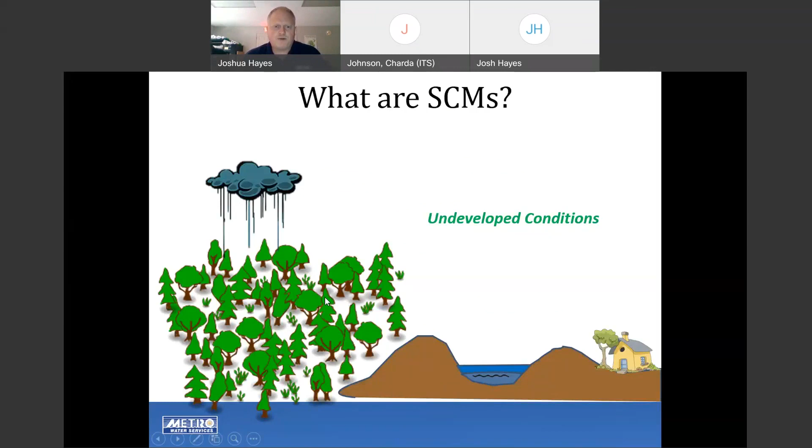So to start off, what are SCMs? I think a lot of people know what they are and what they're for, but just to recap: if you have an undeveloped property with a lot of vegetation, trees and grass, when it rains that vegetation acts as a sponge and a filter. When you develop a property, remove all that vegetation, and put up parking lots, buildings, roadways, that sponge and filter has been removed. So when it rains, all the pollution and contaminants on that parking lot and roadways wash downstream without a filter, and none of it is absorbed into the ground. So you end up with higher creek levels, downstream flooding, and the water in the creeks is a lot more polluted.

So what we require when sites develop in Davidson County is that they put in structures that intercept that water coming off those dirty parking lots and act as that filter and sponge that was removed when the development removed that vegetation. So what we're trying to do is get the same end result: clean water and reduced flooding downstream.

It's important to note that the sites you guys represent or may own would never be allowed to develop without these structures. The only reason they were allowed to get a grading permit was to put these structures in place and to sign an agreement ensuring they're maintained by the property owner and all future property owners.

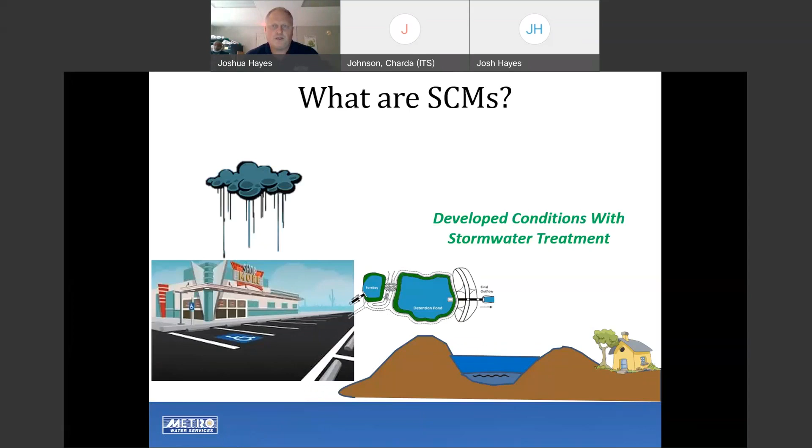So real quickly, a brief history of our regulations. Our first stormwater management program really started in the late 70s, and it was all focused on flooding, really on large developments. We made them put in large detention ponds to prevent downstream flooding. So we ended up with large ponds with large pipes that discharge from them. We slowed down the water a little bit, but still a lot of the pollutants were going through the outlets.

In the late 90s, with new permits handed down through the EPA with the MS4 permits, we had to expand our program and also treat post-construction runoff with water quality. So the outlet structures on these ponds became a lot smaller. We had to hold back the water a lot longer, and settle out the pollutants into the basins so they weren't discharging through the pipes.

When we changed our regulations in the early 2000s, grading permits were required for every site that disturbed over a quarter of an acre. So if you were getting a grading permit, you had to put in these permanent post-construction controls, what we call SCM, stormwater control measures. In the early 2000s it took off, with hundreds of them being installed across the county as the developments went in.

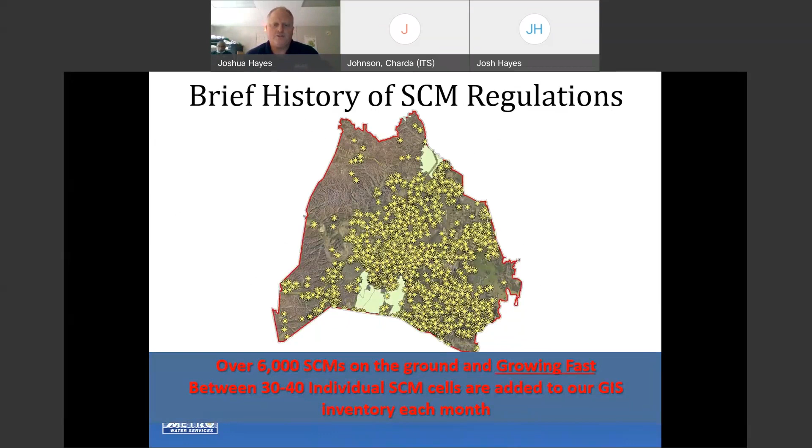Currently we have over 6,000 structures in the county, across all the various watersheds where development is occurring. With development here in Nashville, we're adding about 30 to 40 a month to our system. Basically, when projects get signed off after the construction phase, they come into our system, and then it starts the process of us going out to the sites, making sure the property owners are maintaining the structures.

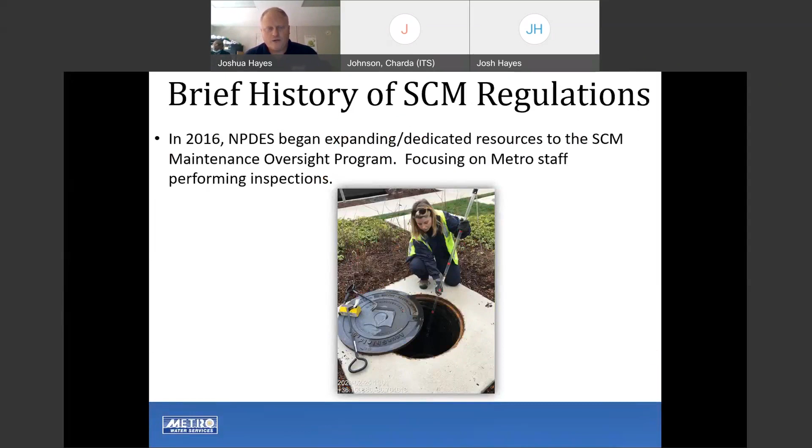So with that said, with the sheer number of structures in our program, we realized we needed to expand our program so we can reach out to all these property owners. We really started expanding our program in 2016 so we can focus on doing our own inspections, but also work with property owners to submit their annual reports. So that's a brief overview. Now I'm going to turn it over to Liz Steinstraw. She's going to give you a little information on the different types of structures that we have.

Hi everyone, I'm going to talk about the different types of SCMs we have. Within our county, we have about 6 that we consider the big 6: dry detention ponds, proprietary devices, wet ponds, bioretentions, permeable pavement, and water quality swales.

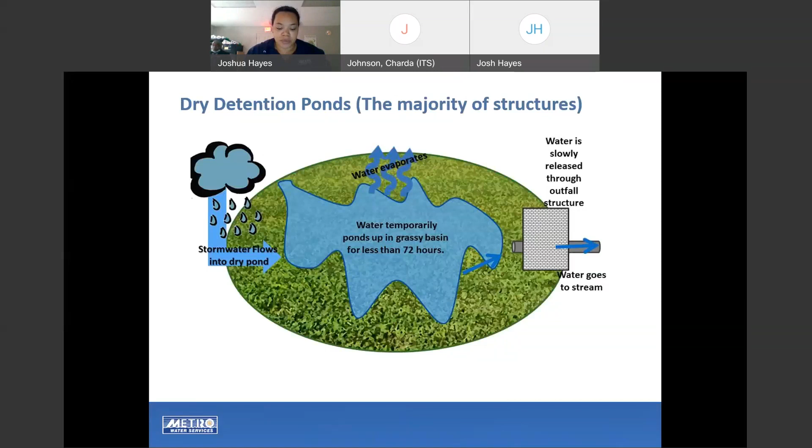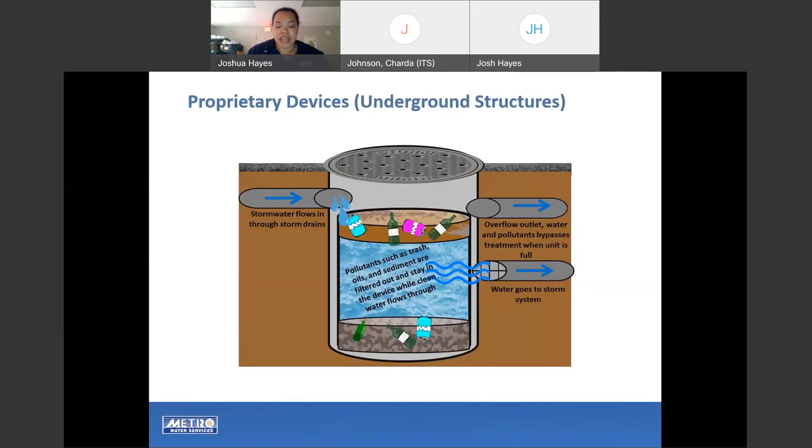One of the newer members of the Big 6 are bioretentions, more commonly known as rain gardens. A bioretention is an engineered basin filled with specialized soil mix and native plants. When stormwater enters the basin, several processes begin to take place: retention of stormwater to aid in prevention of downstream flooding, infiltration through the engineered sandy soils, evapotranspiration of water from the vegetation, and root systems uptake water, and in some cases, pollutants, as nutrients for survival. These structures are to drain 24 hours after a rain event and must maintain a 75% vegetation canopy coverage.

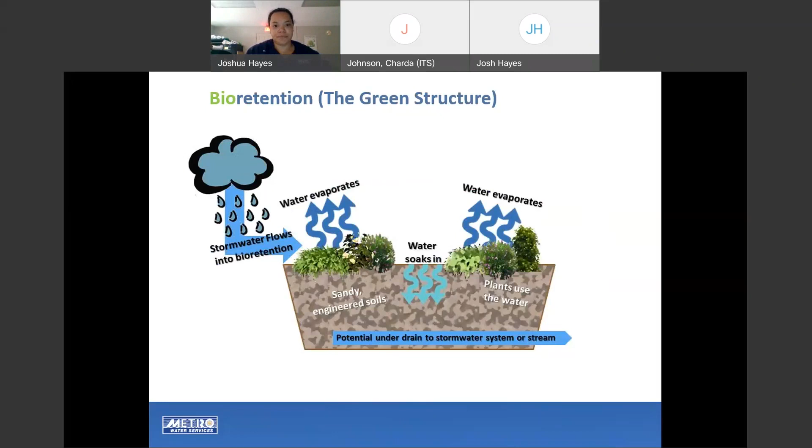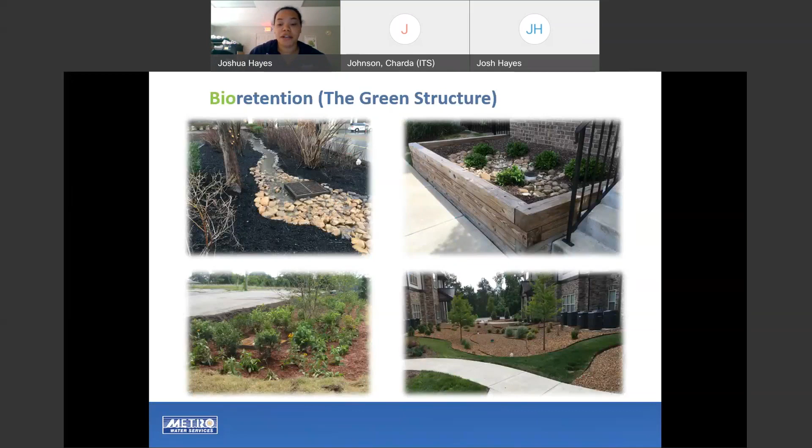Another SCM type is the wet retention pond. Wet retention ponds can consist of a combination of permanent deep pool water and shallow marsh. These ponds allow pollutants to settle out of the water, encourage natural microbial activity that cleanses water, and reduce the overall amount of rain runoff. Sediment, trash, nutrients, metals, and pollutants settle out into the retention pond. Rainwater runoff remains in the wet retention pond for days to weeks while the pollutants settle out.

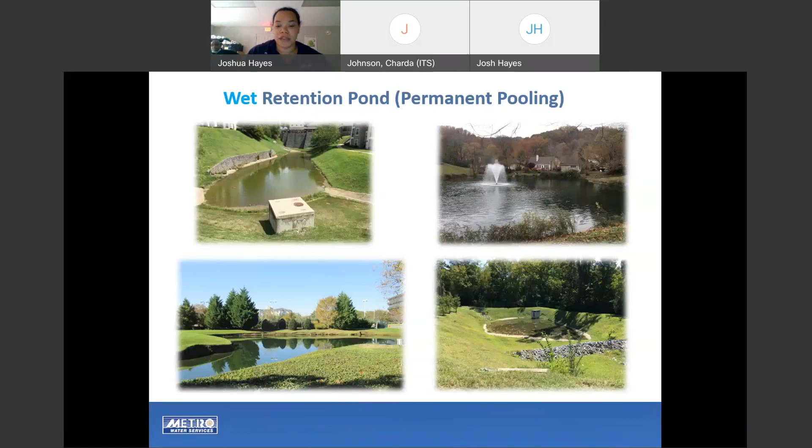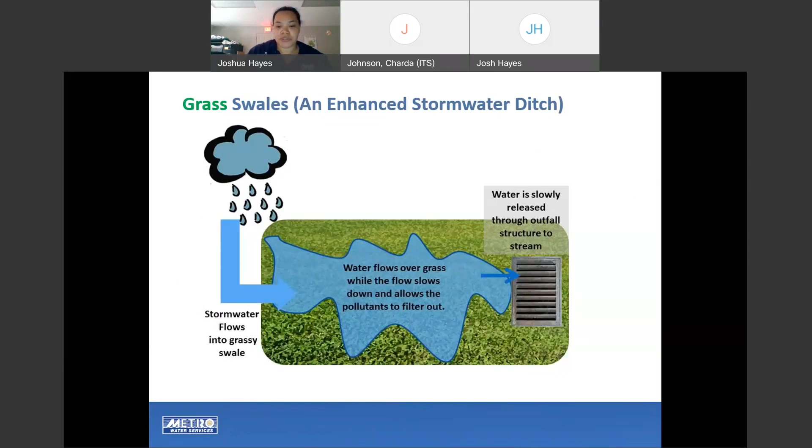The last of the big six are permeable pavements. These pavements have layers of various sized gravel and soil that filter pollutants out of stormwater runoff. During a rain event, stormwater soaks through the permeable pavement into the soil. Car oil, sediment, and other parking lot pollutants are filtered out of the stormwater by the subsurface soils.

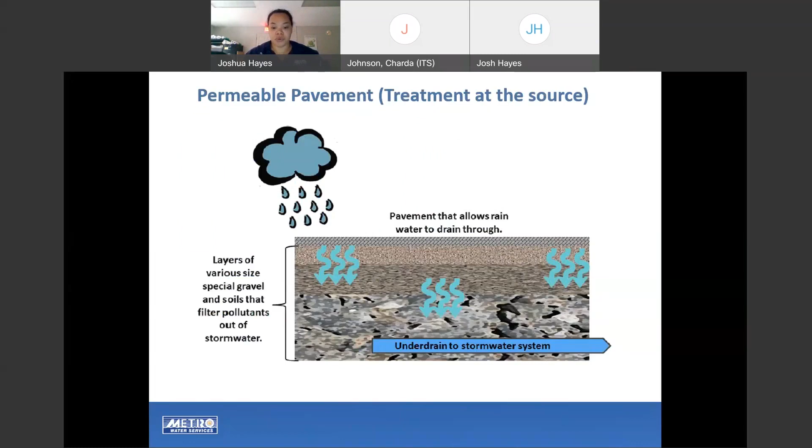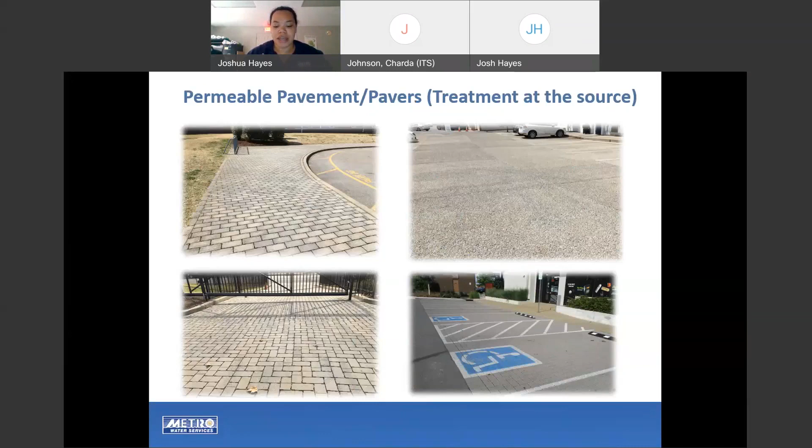Hello, everyone. I'm Jessica. I'm going to talk about the SCM inspection process.

In 2016, NPDES began expanding dedicated resources to the SCM maintenance oversight program, focusing Metro staff on performing SCM inspections. We started by dividing the county into 3 sections for each inspector. We have an inspector for the east and west sides of the county, as well as a downtown inspector.

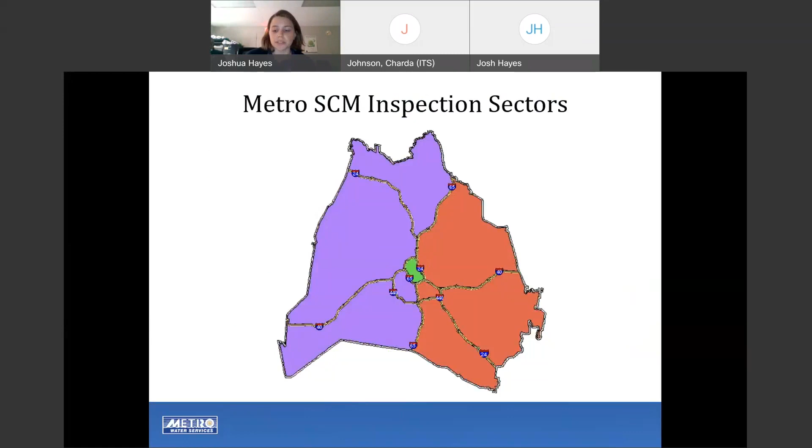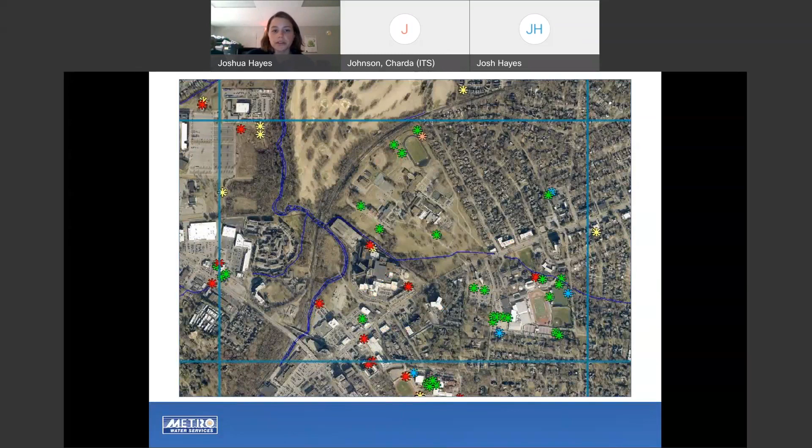We then divided the county into half-mile grids, and we select a grid at random and inspect the SCMs within that grid. Each asterisk that you see is an SCM color-coded by type. The green are bioretentions, red are water quality units, yellow is dry ponds.

So what do we bring with us to an SCM inspection? If they're available, we bring original plans or drawings, aerial maps, an inspection form or something for taking notes, a camera, and tools. So if you have a water quality unit on your site, you'll want something to open that manhole lid.

During our inspections, we use the plans as a guideline for how an SCM should look and function. If they're available, this is what we have on hand for every inspection.

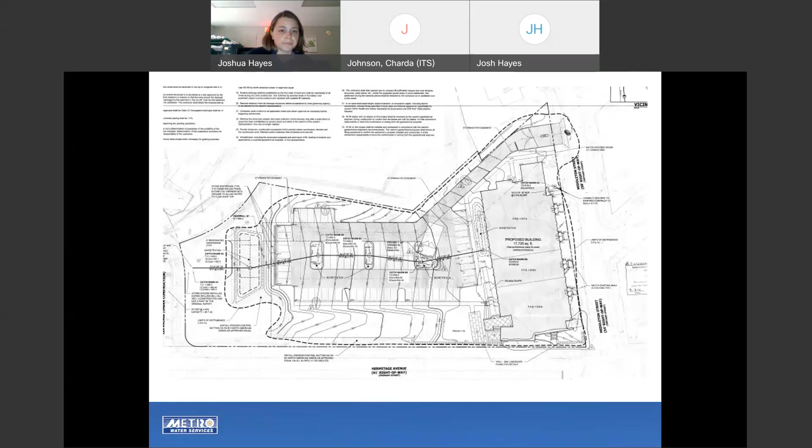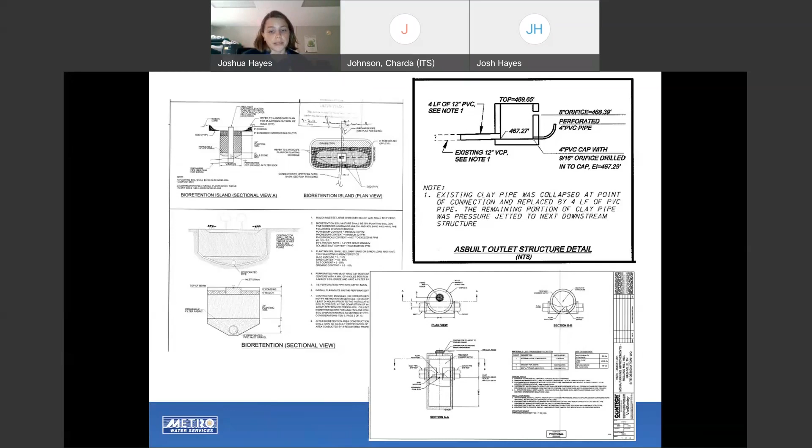Another thing, if you have a bioretention on your property, something useful to have is the original landscaping plan. This could tell you what types of plants were originally installed and how many of each plant. We use the landscaping plan to determine if the amount of vegetation in a bioretention we see during an inspection is acceptable or not.

So when the inspection is complete, if the SCMs are in good condition and functioning, no notice will be sent to the property owner. But we'll try to speak with someone on site if minor issues are noted. And if the SCMs have issues that could impact function, an inspection notice will be sent describing what needs to be addressed.

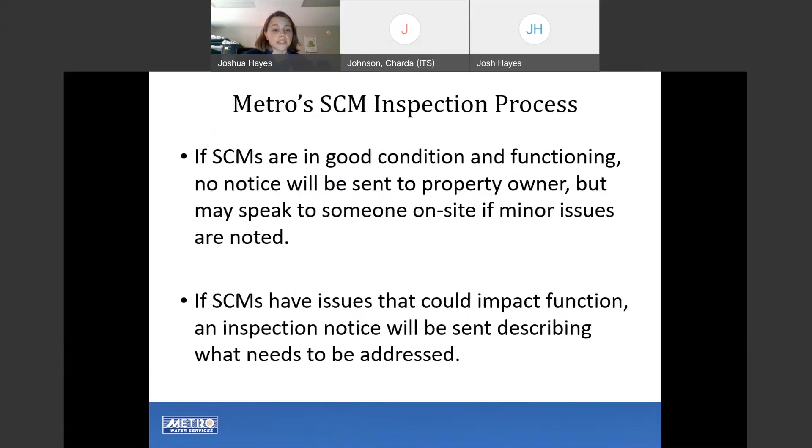Here's an example of a notice of inspection that some of you have perhaps received in the past from us. We include a page where we write out the issues we saw during our inspection. And we also include pictures, an aerial map, as well as the original plans or drawings if they're available.

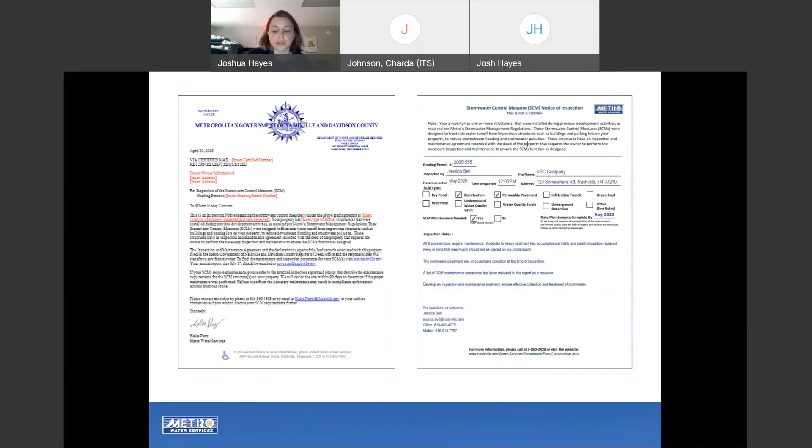And lastly, we include in our inspection notices a list of SCM maintenance companies. Something to note, these are companies who have submitted a signed statement to Metro that states their company will abide by our guidelines. This list is not a recommendation or endorsement by Metro, nor is it an exclusive list of companies that offer SCM maintenance services.

And something to keep in mind as a property manager, your landscaping team might not know what a bioretention is. And it's definitely not a good idea to ask them to clean out a water quality unit. So it's important to find a professional that knows what SCMs are and how they function.

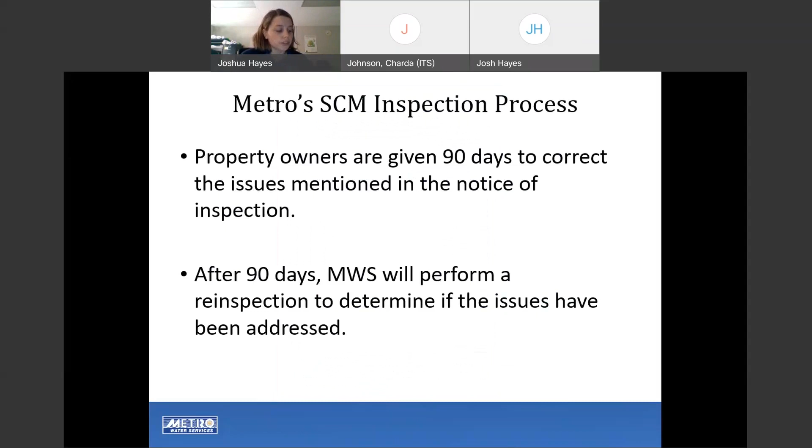So after you've received the letter, property owners are given 90 days to correct the issues mentioned in the notice of inspection. And after 90 days, we'll perform a reinspection to determine if the issues have been addressed.

So if a site has altered or removed their SCM, and compliance hasn't been achieved through sending a notice of inspection, we will enter enforcement proceedings. This could potentially involve issuing administrative penalties to the property owner. The next steps could be environmental court or placing a hold on all future permitting for the property.

And that's a general overview of our inspection process. I'll now pass it over to Rob and Matthew.

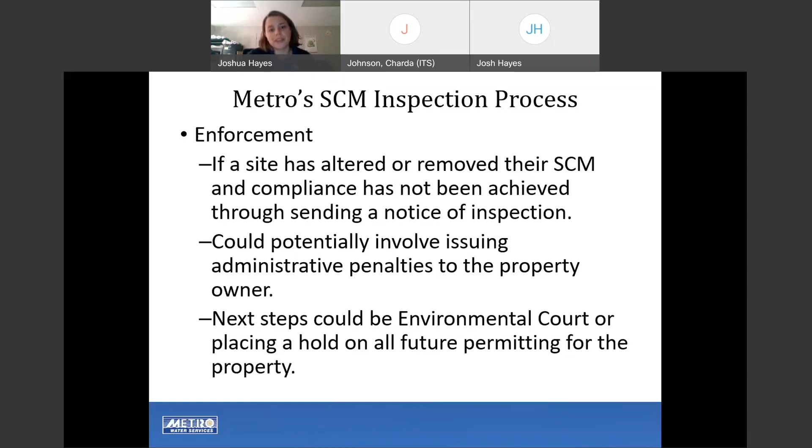So there are many different types of stormwater control measures in Davidson County, but we'll just be going over some of the maintenance requirements for the big six.

But whatever type you have, you should ensure that it's clear of trash, sediment, and debris. And of course, you'll need to stabilize any exposed soils and ensure ditches and pipes routing to the pond are free from erosion and damage. It's important that dry ponds drain within 72 hours after a rain event.

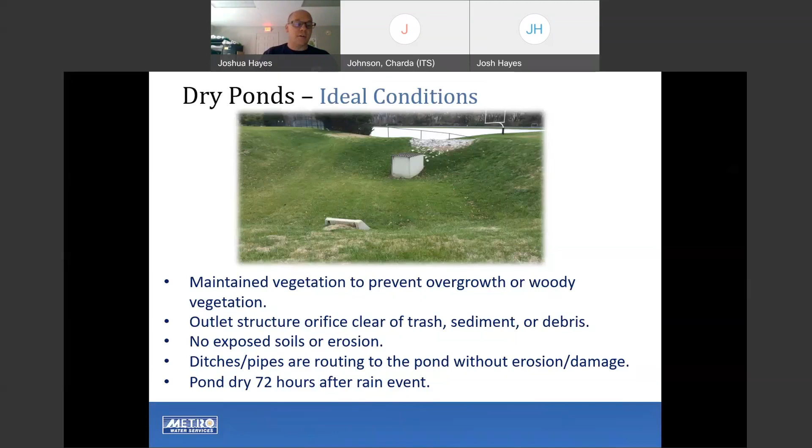One of the best times to inspect a dry pond is a few days after a rain event to see if it's still holding water. If it is, often it's a simple fix like removing debris or sediment from around an orifice. Other times, regrading may be necessary.

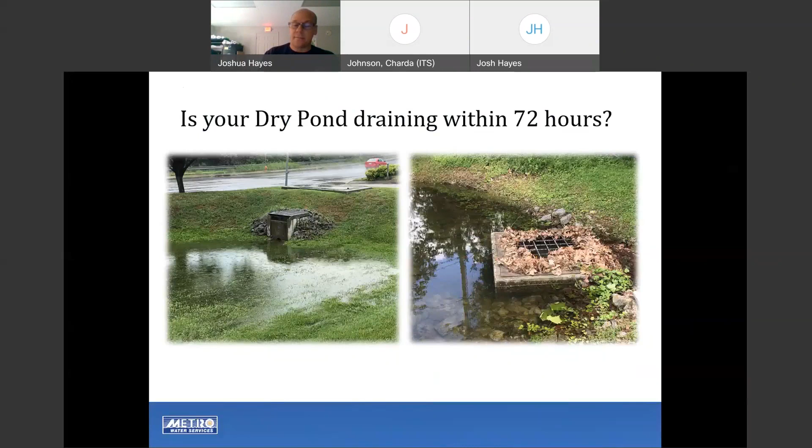So often we see pipes disconnected from their head walls, and if it's caught early and the gap is filled and regrouted, then more costly repairs can be avoided in the future.

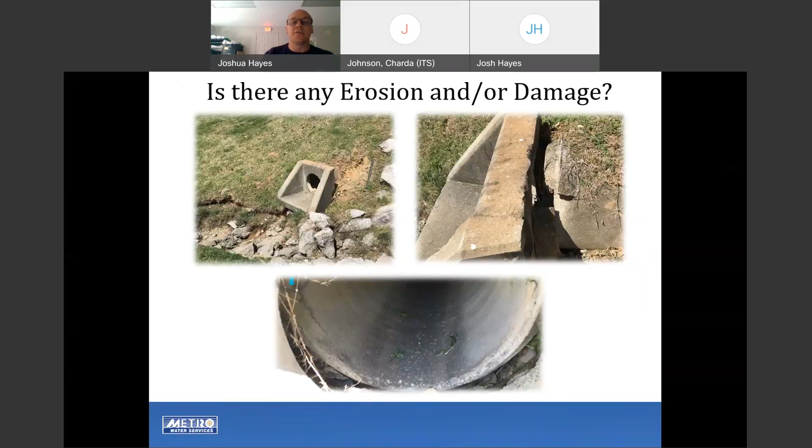So just to reiterate, you should inspect your outlet structure regularly and remove any obstructions.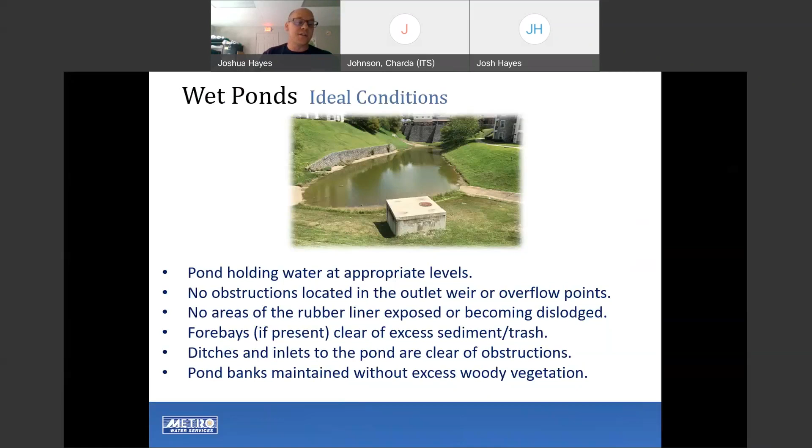So with these, you'll want to ensure that there's no obstruction in the outlet, weir, or overflow points, that the rubber liner, if present, isn't exposed or becoming dislodged, and that forebays, if present, are clear of excess sediment and trash. And the same as for dry ponds, ensure that ditches or inlets are stable and clear of obstructions. Also, the wet pond banks should be maintained without excessive woody vegetation to prevent any leaks or damage.

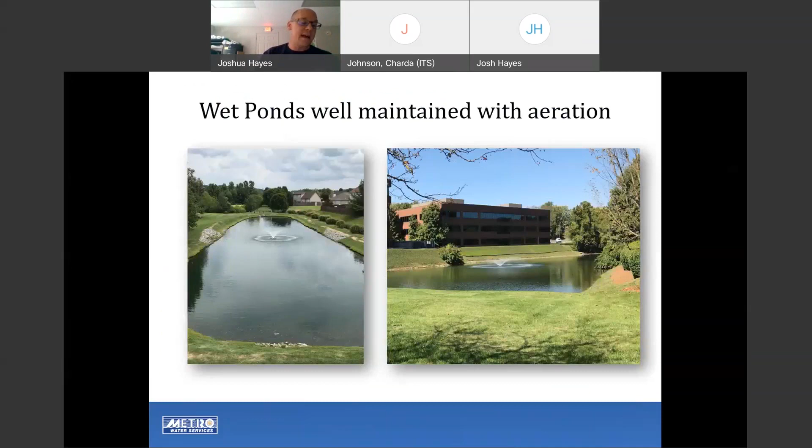So here's some examples of well-maintained wet ponds with aeration. And although we don't require aeration, they can control algae and be a nice addition to your landscape.

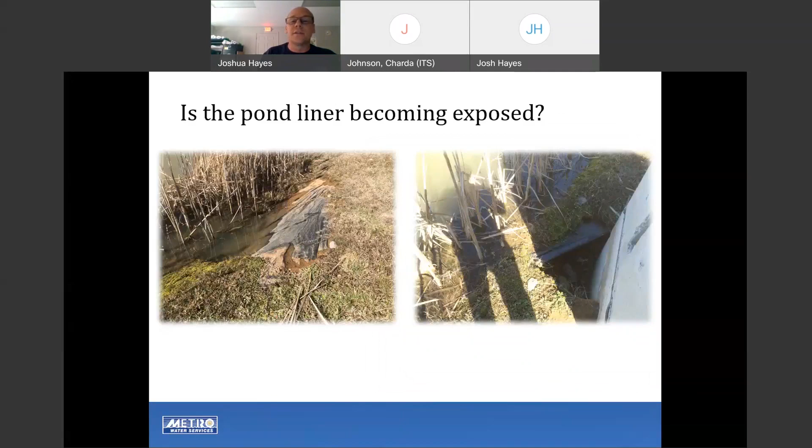So here's the line showing a liner that's got erosion going into it. You'll want to catch that early as well.

So if you do have a forebay, you want to make sure that, since these prevent sediment from entering the wet pond, it should be cleaned out regularly to prevent more costly removal from the wet pond itself. The cattails are indicators that there is excessive sediment that should be removed.

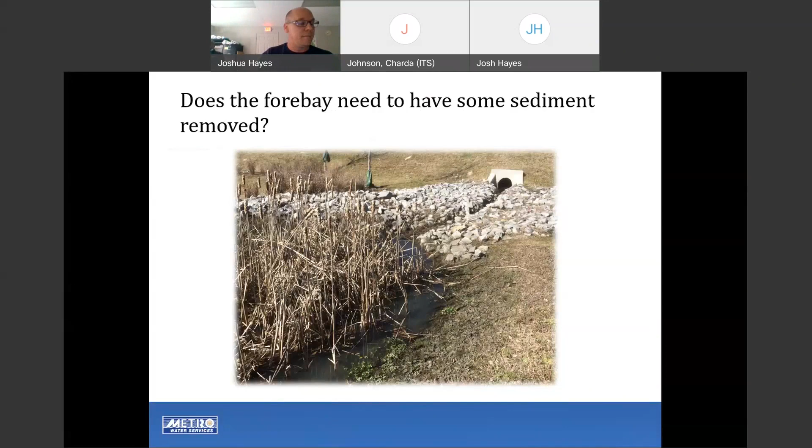So bioretentions or bioretention basins - while dry ponds are historically the most common SCM in our area, bioretention basins are the most common being installed currently because they have been proven to be very effective in treating stormwater runoff. However, they do require vegetation to be maintained frequently throughout the year to prevent unwanted vegetation from creeping in, similar to weeding your garden or other landscape on your property.

Washed out mulch or stone should be replaced as needed. There should be no erosion along the sides or at the inlets to the basin. The basin should drain within 24 to 48 hours after a rain event, and there should be no signs of overflows or bypassing from small storms.

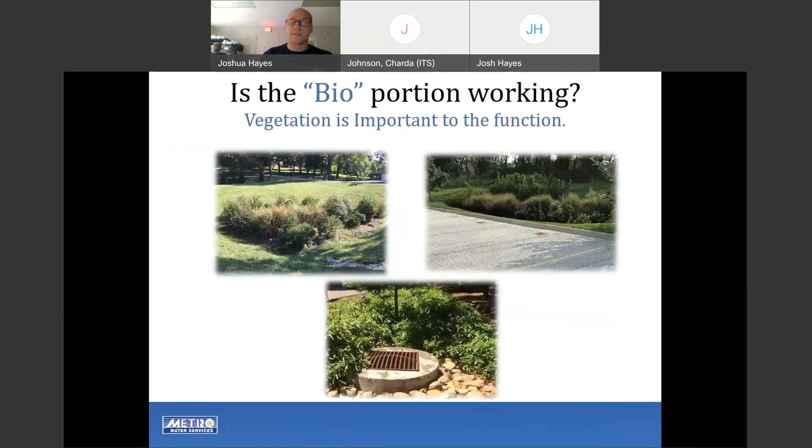So is the bio portion working? Healthy, thriving vegetation is very important to the function of a bioretention. If the original vegetation has died, it will need to be replaced. We don't require the exact same vegetation that died, but are open to similar alternatives since vegetation performs better in some conditions than others.

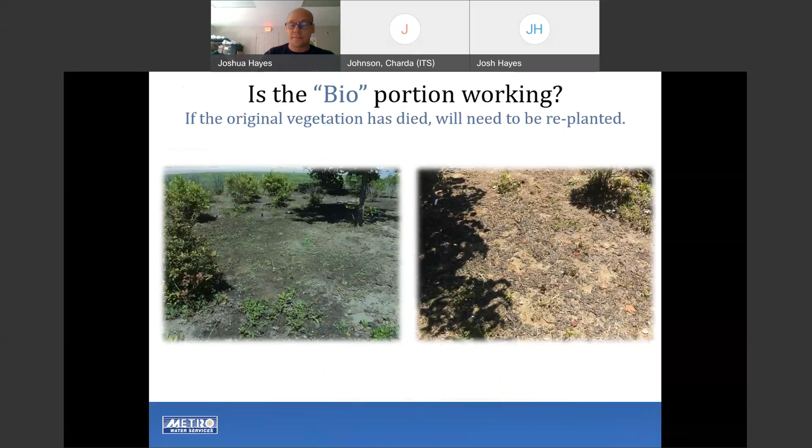You should look for signs of frequent bypassing or overflow. There could be a problem with the soil media or underdrains. Often the mulch layer fills with sediment and needs to be removed and replaced with new mulch instead of just mulching over, as we see here in the photo to the left. The overflow should extend above the mulch or stone layer with a few inches of freeboard.

As with any SCM, you should stabilize your inlets as necessary. Forebays are designed to trap sediment and should be cleaned out regularly to prevent carryover into the bioretention where it's more costly to remove.

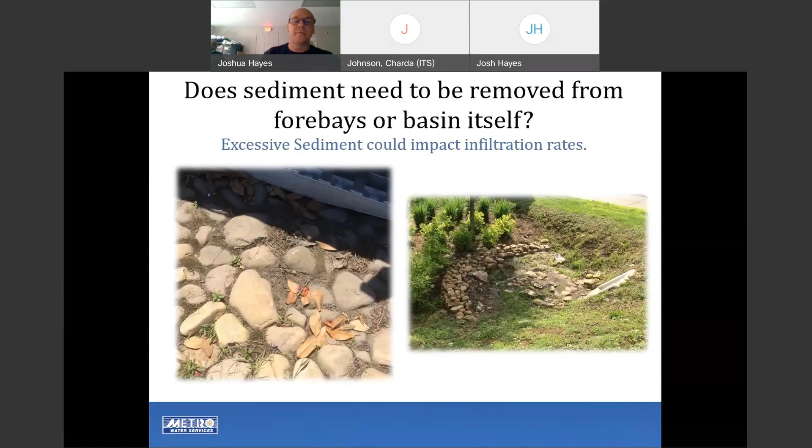If you see your bioretention isn't draining within 24 to 48 hours following a rain event, you may need to have the biomedia either reworked or replaced.

So grass channels or grass swales are often conveyances to other SCMs. They slow the water down, settling out the sediment, and provide some infiltration. Like dry ponds, the grass should be maintained to prevent woody vegetation, but not mowed short. Ensure that there are no eroded or exposed soils, that they are free from trash and debris, and that any excess sediment is removed regularly.

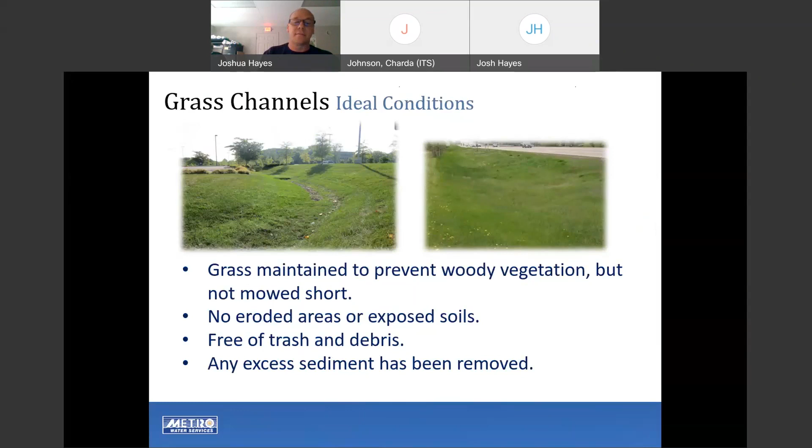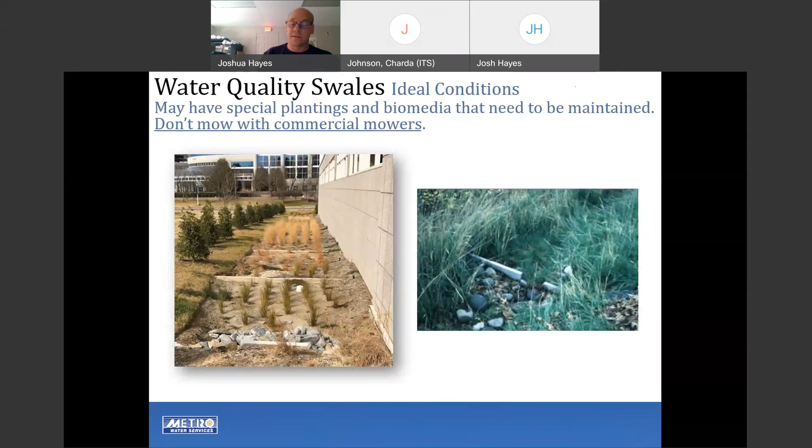And the last surface SCM that I'll go over is permeable pavement or pavers. They provide an excellent treatment of the first flush of a rain event, capturing oils and sediment from a parking lot. They should be maintained regularly by sweeping, blowing, or even pulling weeds. It's best to inspect during a rain event to ensure water is infiltrating. If you see sheet flow or ponding, you should seek professional assistance for a deep cleaning or restoration if needed.

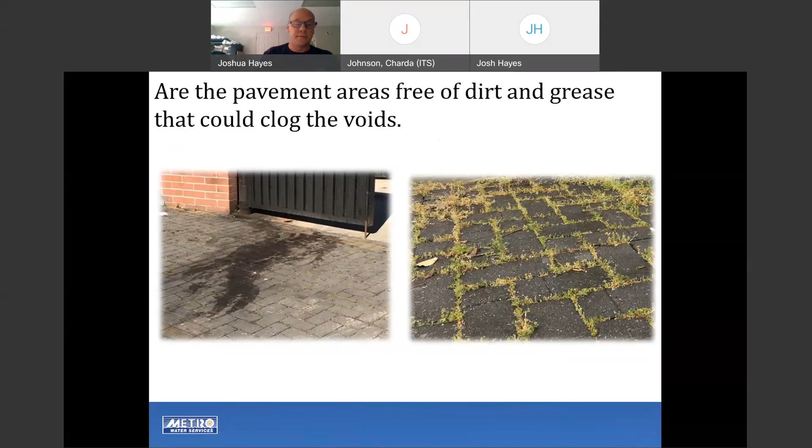Grease from dumpsters can really clog up the pore spaces, and regular sweeping or blowing could have prevented all these weeds. Eventually a deep cleaning will probably be necessary, and here's an example of some of the equipment required.

And with that, I'll pass it on to Matthew Lockhart to discuss maintenance of underground water quality units.

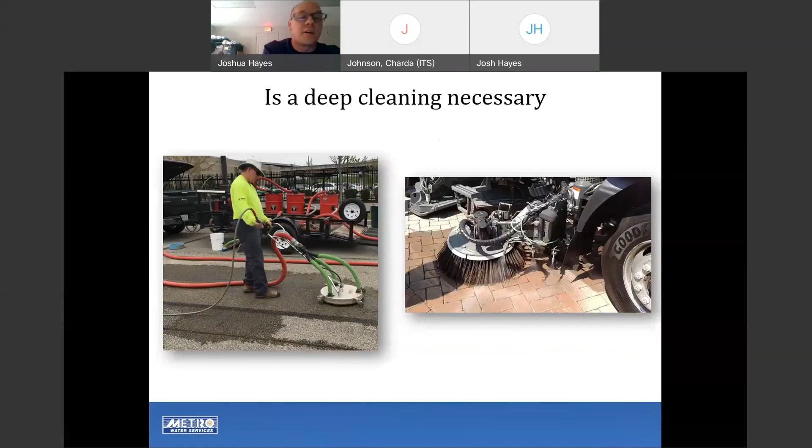So water quality units are getting their own category with a couple of slides, due to water quality units having 4 different categories within themselves of different types of units, and we'll dig into those just a little bit. First off, water quality units are the second highest implemented SCM after dry ponds. Most of them have been installed in the early to late 2000s. These units are usually found underground, so they are considered a confined space. You have to be trained and permitted through OSHA to enter these units.

These units are made by different manufacturers with multiple models and unit sizes. They all serve the same purpose, though, of capturing sediment, trash, and other material. The maintenance requirements for each of these units is based on the manufacturer, the model, and the unit size. The devices require frequent inspections, and these devices require specialized equipment to inspect and maintain. You should contact professionals about performing inspections and must contact professionals about performing maintenance.

So just some of the devices that we allow. This slide is to point out the variety of water quality units in Davidson County. We right now have 21 approved devices that are allowed to be installed during development of a site, with 8 more devices that we know of that have been installed on sites that are either no longer approved to be installed or have changed names under new manufacturers. All these devices still serve the same purpose of capturing runoff material from sites. All these units reach a point where, if maintenance is not performed when needed, they are designed to allow runoff to bypass treatment.

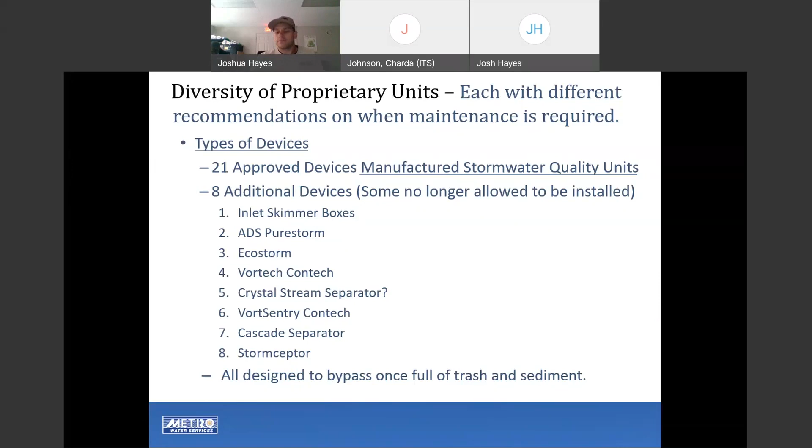Our first category of water quality units are underground detention vaults. These consist of large vaults or a series of interconnected pipes. Their main purpose is more of a water quantity rather than water quality purpose. They are designed to hold water for a certain period of time while releasing it slowly downstream of the site. Because they hold back water, some sediment could settle to the bottom of the units. These do not usually require regular maintenance, but should be inspected for sediment buildup at the access ports if present.

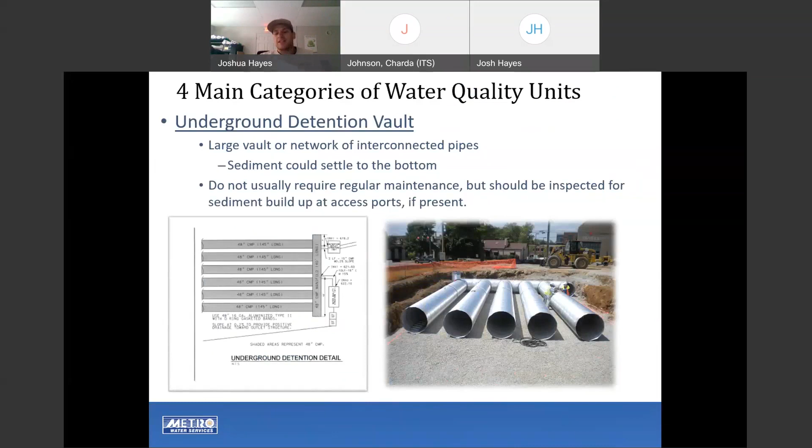Our next one are filters and media units. Runoff enters these units where it flows through filter or media bags. Sediment and other pollutants are captured within these filters and media bags. Manufacturers' manuals should be consulted for signs to look for when these units, filters, and media bags should be replaced, or when the filters and media bags are past their life cycle. Usually units cannot just be cleaned out when maintenance is needed; the filters and media bags must be replaced as well. Consult with the manufacturer if maintenance is needed. To do inspections on some of these units, you must enter them. These units require professionals with proper training, permitting, and equipment to enter.

Our next is the vortex sump units. Runoff enters these units where it swirls around or is slowed down by a barrier. Trash and oil will settle to the top and sediment settles to the bottom of these units. Sediment and trash should be pumped out and properly disposed of when maintenance is needed. You should consult a manufacturer's manual for the unit to ascertain the level of sediment and trash allowed before it should be cleaned out.

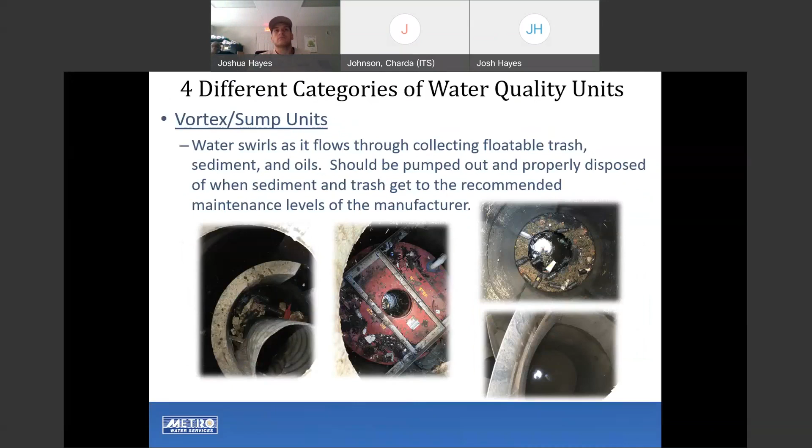Our next are cage and box units. These units consist of compartments with baffles and/or screens that are used to slow down the flow of runoff. This allows it to capture trash, debris, sediment, oil, and any other pollutants. For some of these units within this category, maintenance can be determined by what is seen within the unit when it is open for inspection. We still recommend checking the sediment levels within these units if it has been determined that debris and trash buildup is low by visual inspection. Some of these units may require more frequent maintenance depending on how much trash and debris is draining to them. During fall months, these units will have more debris buildup due to the amount of leafy debris on the ground.

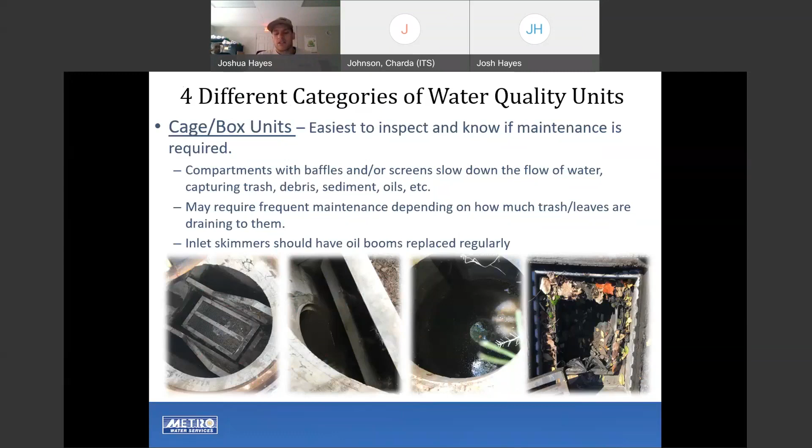One of the units in this category is known as the inlet skimmer box. The picture on the right of the screen is an inlet skimmer box. These units have an oil boom that must be replaced regularly to allow the unit to function properly.

When you're doing a water quality inspection, we highly recommend hiring a professional to inspect. Inspection consists of removing manhole covers or hatches and utilizing rods or measuring tubes, a sludge judge, to determine sediment levels. We ask that this be done very safely, with the use of cones and maybe a partner when opening these units. Always be mindful of your surrounding traffic and never enter a unit, as they are considered confined space. Maintenance will require a company with specialized equipment that can pump and vacuum liquids and solid waste. All waste must be properly disposed of by a hauling company and shall maintain any waste manifest if requested.

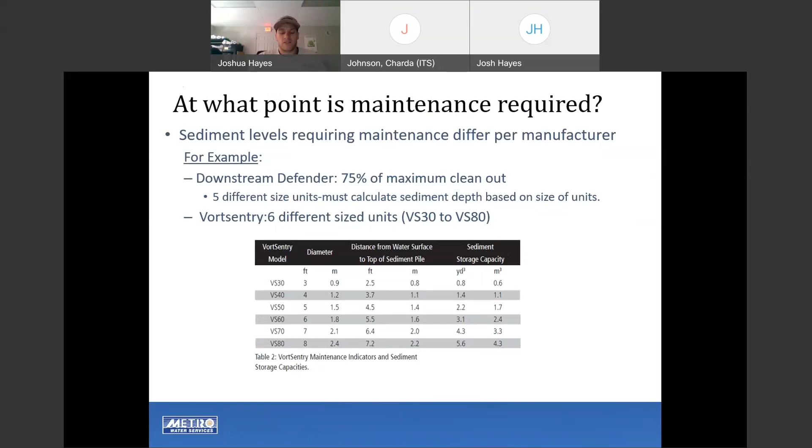This slide is just to point out how the inspection and ultimately the maintenance of the unit is based not only on the manufacturer, but the model and the unit size of the water quality unit. The first model, the downstream defender, has 5 different size units, with each unit size allowing different levels of sediment before clean out is needed. The same is true for the unit below, the VortSentry. It has 6 different unit sizes, with each one allowing different sediment levels. The chart below for the VortSentry shows the sediment capacity for each of these size units.

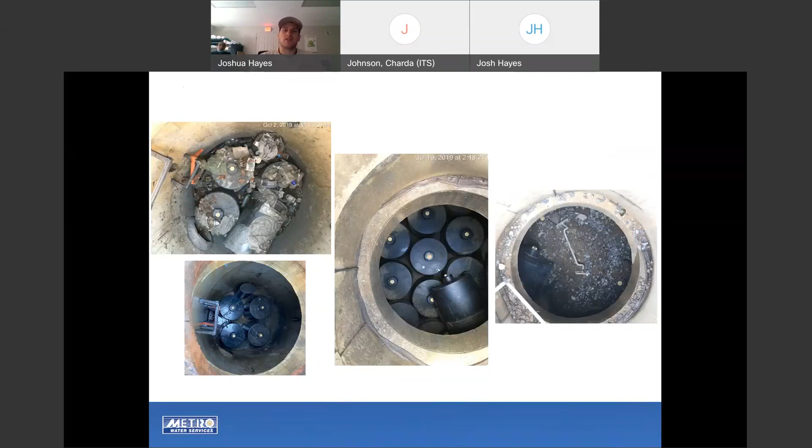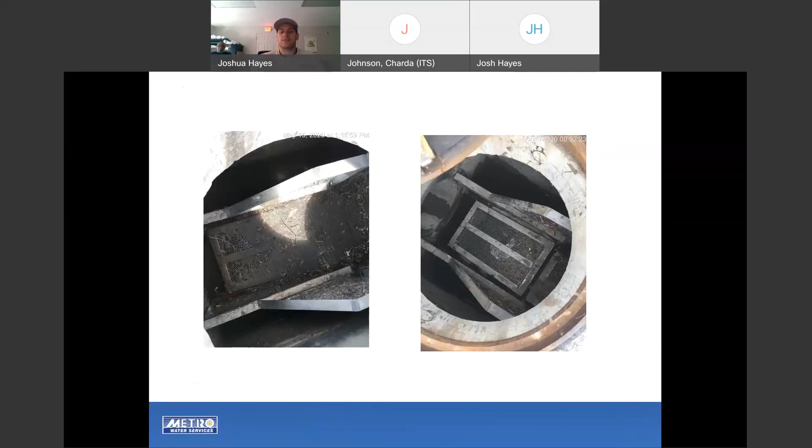Finally, this is an inlet skimmer box. The picture on the left shows what it looked like during initial inspection. As you can see, the box is filled with sediment. Around the square perimeter, you can see kind of like a fabric - that is what is left of the oil boom. It is completely deteriorated, and so at the time of inspection, this unit was non-functional.

The picture on the right shows what an inlet skimmer box should look like - a properly functioning inlet skimmer box. You can see that the screen has been cleaned out in the box area, and that there's this white boom surrounding it. That is the oil boom used to treat the oil coming into the catch basin.

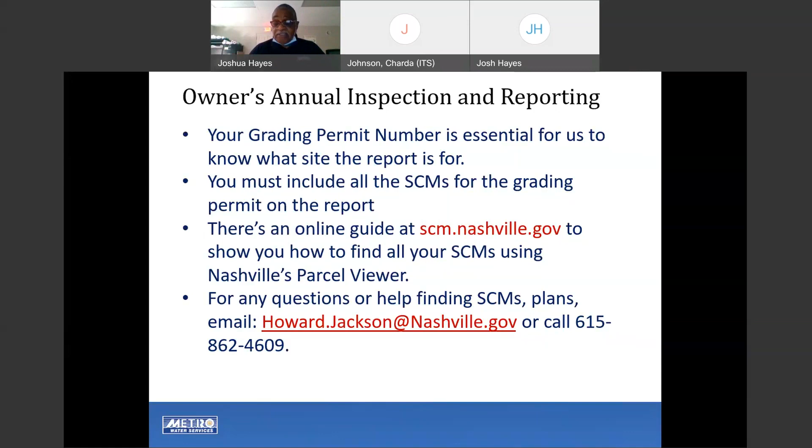Now, I want to advise you, please try not to send your annual reports in by mail, because it only lengthens the process. It's much quicker and faster for us to enter and approve that information if you submit it online, as I've advised previously. But any correspondence you send us will go either to myself, to Josh Hayes, or to your individual inspector. So never hesitate to write us if you feel the need.

Now, the next page we're going to look at one of the most important developments that has come about in identifying these SCMs in Davidson County. Just to give you some insight, these parcel viewers are being used all around the country now, so that municipalities can identify the parcels, the stormwater control measures on those parcels, and a variety of other information.

Now I'm going to give you a link, which is also on this page, in case you choose not to print it or can't print it. If you can write down this link: https://maps.nashville.gov/parcelviewer/. That's a lot, so I usually just type in 'Nashville parcel viewer' and it comes up. If you can't remember all that, just put 'parcel viewer, Nashville, Tennessee,' or 'parcel viewer, Davidson County, Tennessee.' Don't just put 'Davidson County' alone, because there's one in North Carolina that will come up instead. Make sure it says Davidson County, Tennessee.

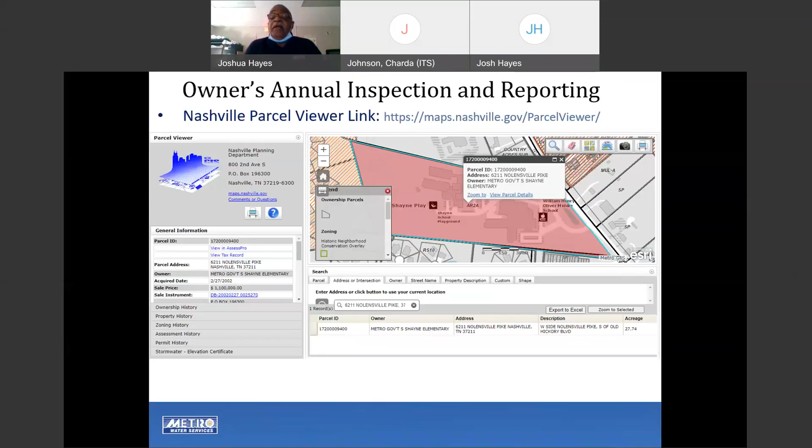Okay, you want to click on that, and I'll tell you why. After you go from the very top box on the right-hand side, you'll see the spyglass, the brick, 4 locations there, and then you'll see the layers. That's probably the most important one, number 4, right next to the camera. You click on layers, and it will have a drop down.

When that drop down comes, scroll down until you see stormwater, and click on stormwater. I sometimes use streets too because I want to be able to see them. You may want to see them too. The system won't break if you click on streets, so if you feel so inclined, you can do that too.

Once we get stormwater and streets in there, go down to where the address tab is and click on it. You'll notice here 6211 Nolensville Pike came up, and on that same parcel it pops up some interesting information here.

You see those little gold stars? Those are indicative of your storm control measures. On this particular parcel, we can readily see 2 of those stars. But you'll notice in the upper right-hand corner there's a little arrow that points to the right.

If you click on that arrow, I'll go to the next one. If you click on that arrow, it will say Project ID. That Project ID is your stormwater grading permit. In this particular case, it's 2016035729, and it says control type PT T03 bioretention - it's a bioretention site for this particular gold colored dot.

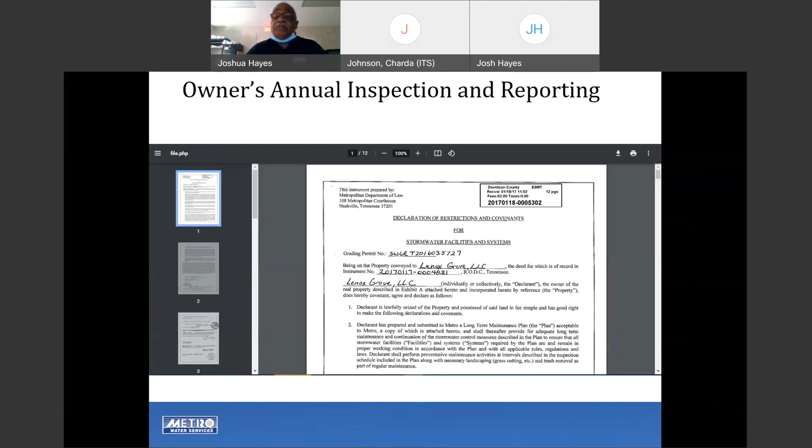In your upper right-hand corner, you will find what that number means: 2017-0118-0005302. And it will have the stormwater number 2016-035, that looks like a 729. Okay, so that's your maintenance agreement, and that is your stormwater agreement. So you can know that you're in the right place. This is for Lenox Grove LLC, and again, we have the instrument, which would have been the deed. Okay, let's go on to the next page here.

I know I'm taking a little bit of extra time here, but it's so important that we get this right. And I don't mind talking to you. So anytime you want to get in touch with me, you can.

Now we're going to go over the form itself, the owner's annual inspection and reporting summary. We're currently working on a new updated annual inspection report to be posted soon to our website. As I mentioned, this form is fillable online. You fill it in completely, you save it, and then you send it over as an attachment in your email.

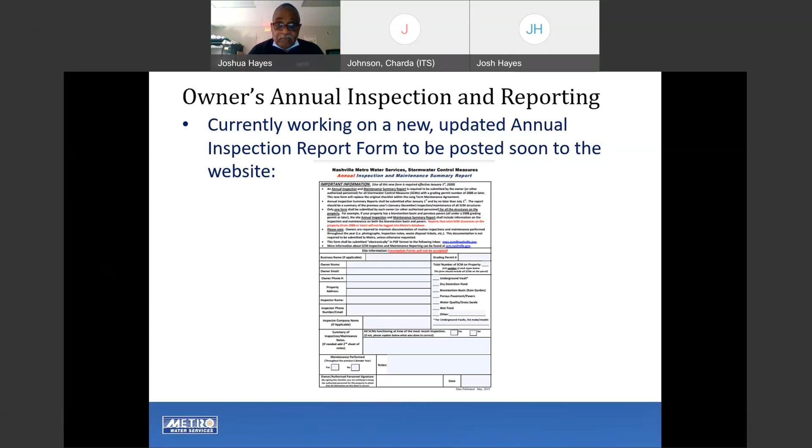Now we're going to the next page, and I'll go over some essential things when you submit these reports, where it says important information. An annual inspection and maintenance summary report is required to be submitted by the owner or authorized personnel for all stormwater control measures. When it says authorized personnel, that can be your actual inspector. If you have an inspector, say from the ABC company, and they're doing the actual inspection, they can sign it and submit it if that is agreeable to you.

If it's not agreeable to you, then the responsible party for the HOA or for the corporation can sign it and send it in. Now, when I say sign it and send it in, it doesn't have to be an in-person manual signature. You can actually sign these reports online as well.

One form should be submitted for each grading permit, we've gone over that. The annual inspection summary report should be submitted within 30 days of the last inspection conducted for the year, but no later than July 1st of the following year. So if you're doing inspections for 2020, it must be submitted within 30 days of the last inspection conducted for that grading permit number, but no later than July 1st of the following year. So you have basically a 6-month grace period, but the sooner the better, because our inspectors can also see these reports, and if the report's all in order, they won't have to contact you.

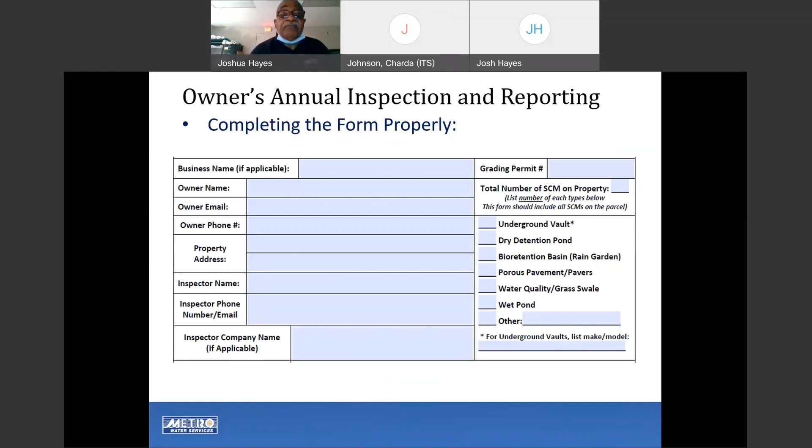Now in some cases you may have two dry detention ponds - what are you going to do? Put two dry detention ponds. Say you have porous pavers, check porous pavers off as one, or if you have two locations, put two. That'll tell me there are two locations of porous pavers on that property. Same thing with the wet pond. Because it says total number of SCMs on property, I want to see the total number. But as you will see in just a second, when we go through this other section, there's a part that says 'all SCMs functioning at the time of the most recent inspection' at the top.

Sometimes folks send it in and they'll have one line or nothing there at all. That's the most crucial part of the report we want to know about, because in our combined report, that's the information we want to give to the state.

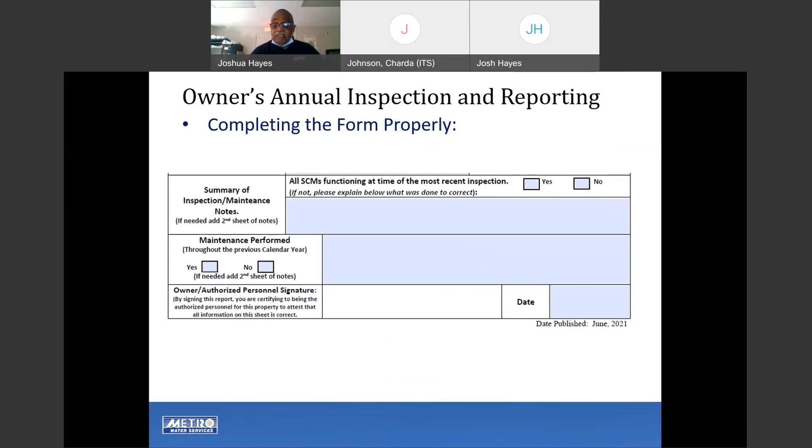One company I deal with quite a bit, because of where the contracts are in the summary of maintenance inspection, will have a multitude of entries. This site was inspected in January of 2020, again in June 2020, and again in December 2020. That's great, but on the bottom right-hand corner, we want to have the date that you submitted the report.

We also have a second sheet on this report—additional inspection notes, additional maintenance notes. Now, we don't want you to write a two-volume deal here, but if you feel the need, it's here for you to fill in, because it helps our inspectors.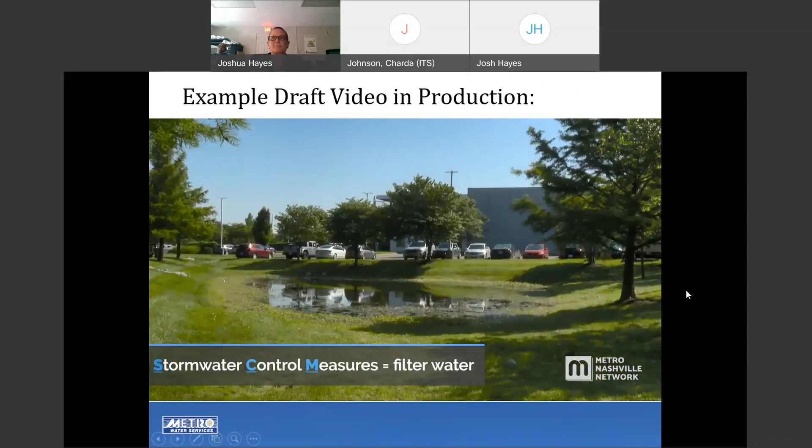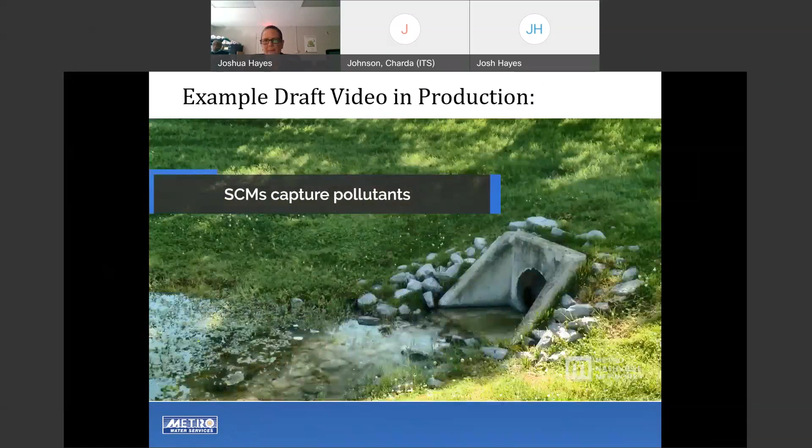Stormwater control measures, or SCMs, reduce flooding and the amount of pollutants in water that reaches our streams. They capture sediment, car oil, excess lawn chemicals, and other pollutants that would otherwise be washed into creeks and streams. SCMs can help reduce downstream flooding by holding back, slowing down, or infiltrating water before draining to ditches and pipes that route to streams. Stormwater control measures have been required to be installed on development sites for several decades throughout Davidson County.

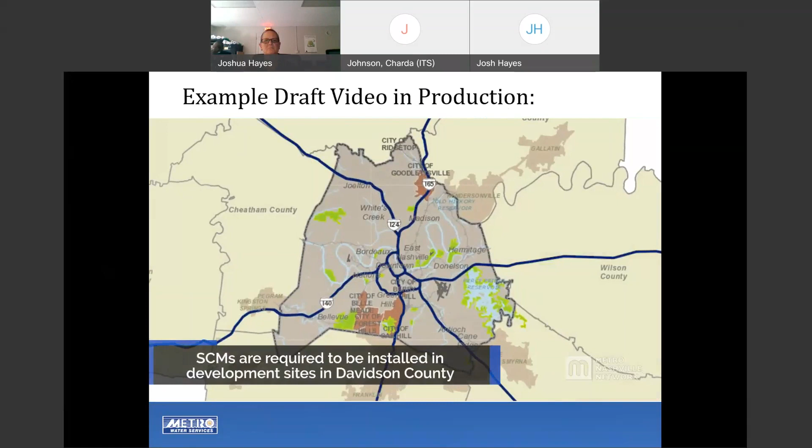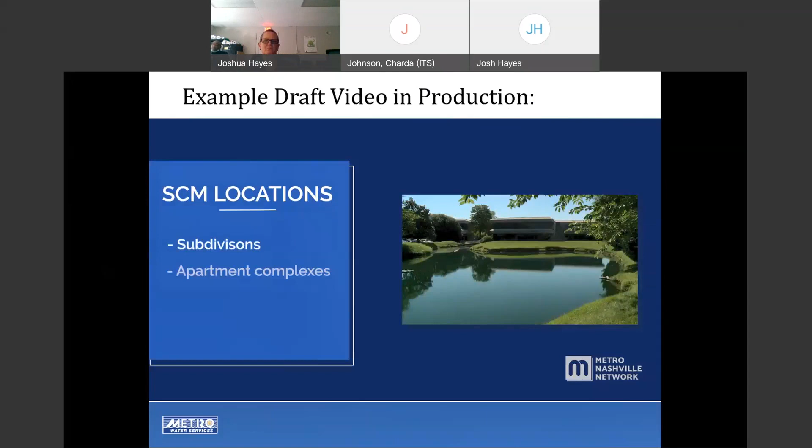Our regulations address how developers must adjust a building site to accommodate the rainwater that will not be able to soak into the ground when buildings and parking lots are built. You can see stormwater control measures in subdivisions, apartment complexes, churches, and commercial sites.

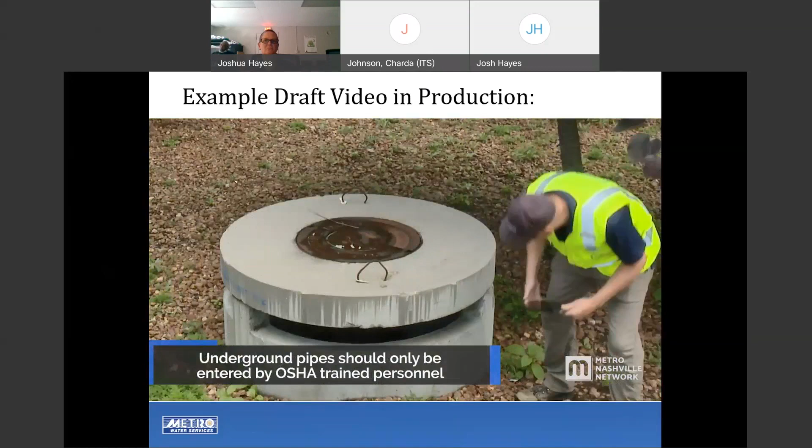While most SCMs are empty during dry weather, it is important to be aware of the safety hazards. They can quickly fill with water during and after rainstorms, and SCMs can have underground pipes that should only be entered by OSHA-trained personnel. There are over 6,000 SCMs within the county, with more being installed every day.

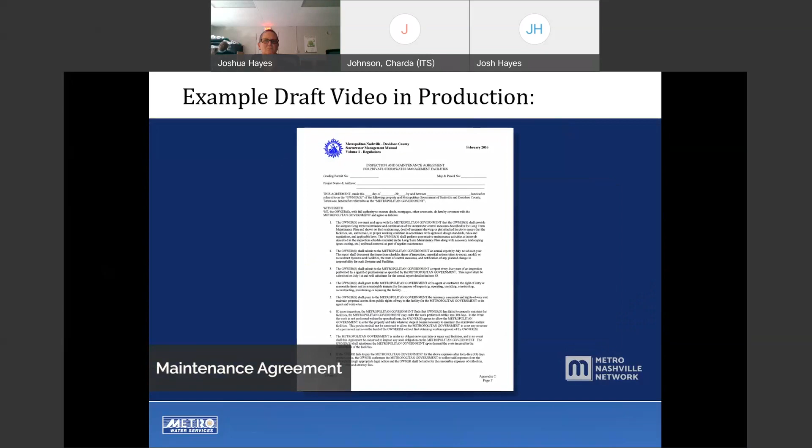The current property owner is legally responsible for inspecting and maintaining the stormwater control measures on their property. Proper maintenance of SCMs not only prevents pollution from reaching neighborhood creeks and streams, it is also a legal requirement. Property owners of sites that were developed after 2007 are required to file an annual SCM maintenance report with Metro Water Services.

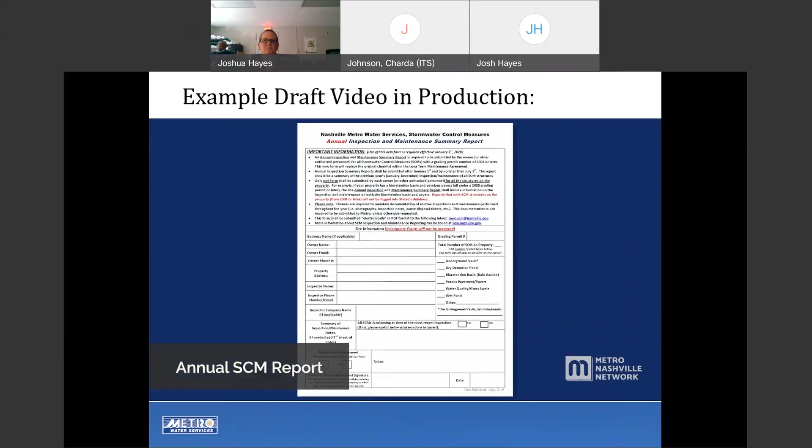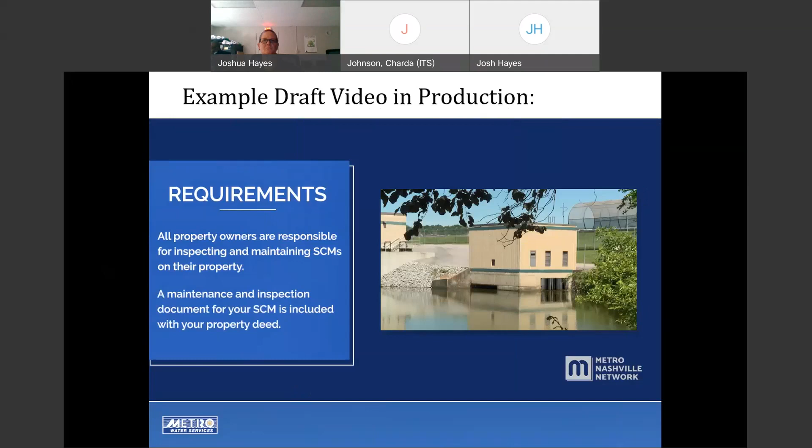All property owners are responsible for inspecting and maintaining SCMs on their property. A maintenance and inspection document for your SCM is included with your property deed. These documents are available through the Metro Nashville Register of Deeds. While sites developed before 2008 are not required to submit annual inspection reports, Metro does encourage and will accept reports from these properties.

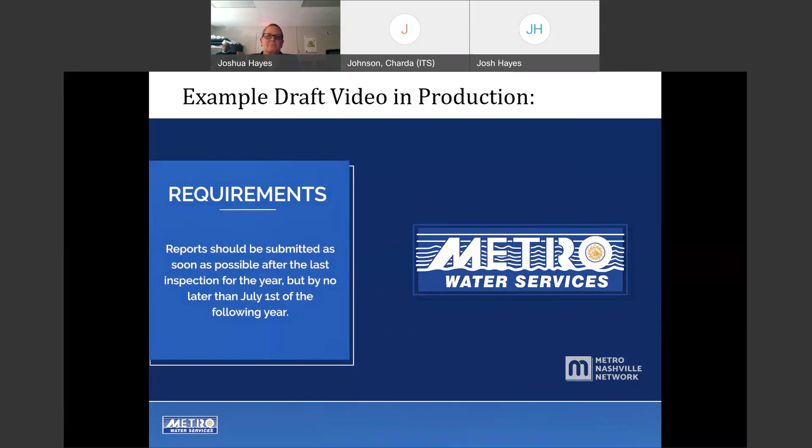Owner-submitted annual inspection reports shall include all of the SCMs listed for the property under the grading permit number that it was developed under. Reports should be submitted as soon as possible after the last inspection for the year, but no later than July 1st of the following year.

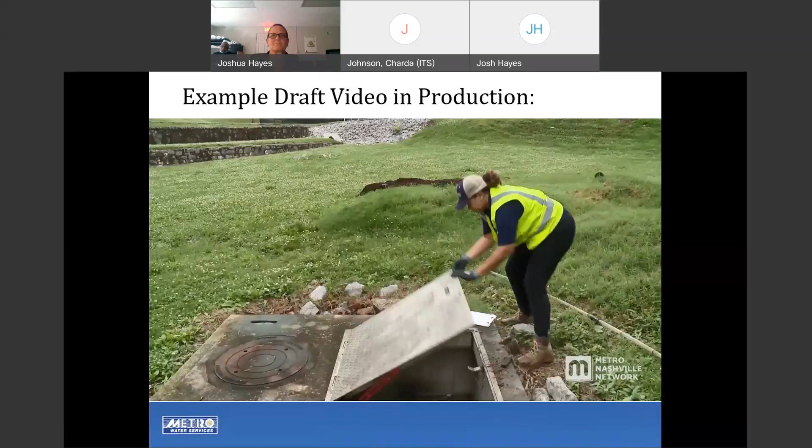For questions on annual reporting requirements, email mws.scm@nashville.gov. Metro Water Service inspects stormwater control measures to ensure they are properly maintained by the property owner and functioning properly. Annual SCM maintenance by the property owner will avoid unnecessary expenses.

All right, so that gives you an example of the type of information we'll be providing. Coming up in this series of videos will be information about each of the big six and how to inspect them.